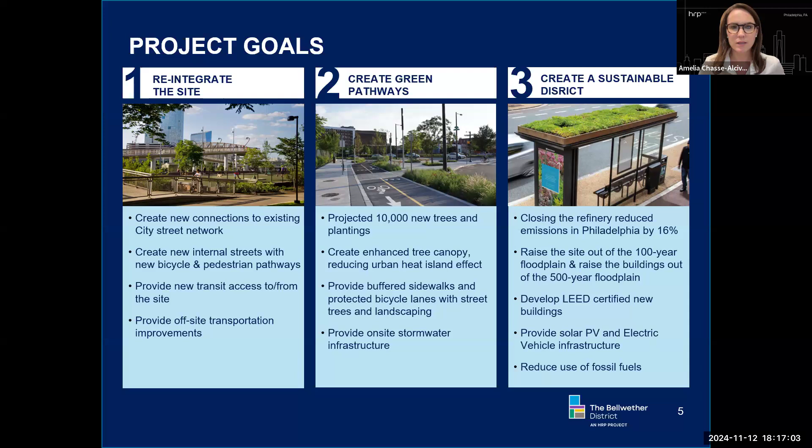This is a little bit outdated actually, we need a new one of these, but this is an aerial overview of the site from when the deconstruction was significantly complete, though it's much further along now. You don't see the rings of the tank bottoms anymore. It just gives you a look at what it was and shows the significant progress made.

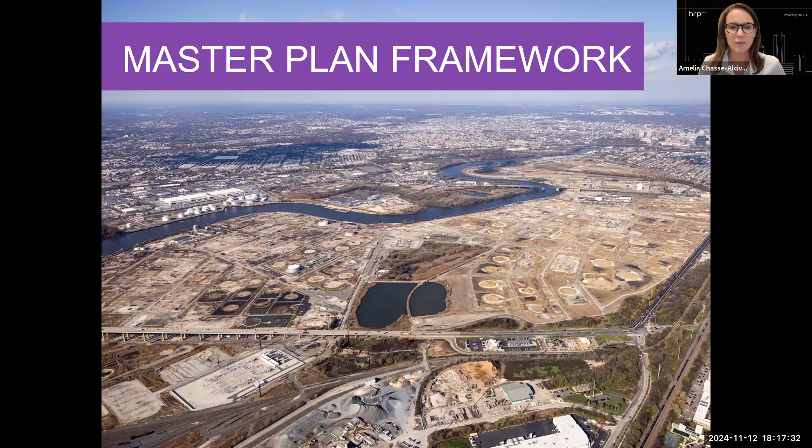This is an overview of our master plan. You can also find this on our website. I know it's a lot, so if you ever need to reorient yourself, it's available at thebellwetherdistrict.com.

We'll start with the north 250 acres that are north of Passyunk Avenue. That's where we're planning our innovation campus—think life sciences, technology companies, looking to extend University City, Pennovation, to the south, and have this be a walkable, bikeable campus where hopefully we can retain Philly talent in Philly and also provide opportunities for skills training for local residents in some of these jobs. I think it's important to note that not all jobs in the innovation industry, particularly in the type of facilities we're building, require advanced degrees. Some do, but many don't.

Then moving south to the industrial campus, south of Passyunk, this is where we're planning to build more industrial facilities, logistics, warehouse, storage, and marine uses. This is where we'll see significant job creation, about 10,500 jobs projected.

According to our economic impact analysis, at a minimum 50% and likely closer to 75% of these jobs will be accessible to individuals who don't have advanced degrees. So there should be significant opportunity for local residents to take advantage.

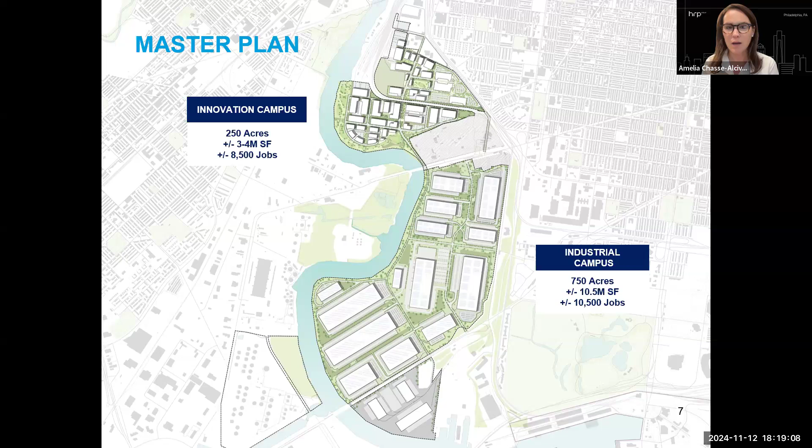Next slide. I'm going to pass it over to my colleague Blake Rowan to go through industrial site progress. Thank you, Amelia. Hi everyone, my name is Blake Rowan. I'm the Senior Vice President of Development at the HRP Group, focused primarily on our industrial campus. Very excited to be here tonight to show everyone the incredible progress we've made since the last quarter.

If you go to the next slide, everything shown on the right side of the screen within the red box is our industrial campus. Within the blue shaded area, that's 447 acres out of the 750 acres we currently have permitted to date, and we've begun earthwork activities over the past 18 months. That represents nearly 2 million cubic yards of earthwork activity, so a significant amount of progress. We're excited that we're nearing the completion of that first phase. We hope by the end of this year to be done.

Everything shown in the tan color within the industrial campus is what we're going to focus on for phase 2 of earthwork activities. We're currently wrapping up the permit process, and we're eager to get started here in the next couple of months. So just a lot of progress. If you go to the next slide.

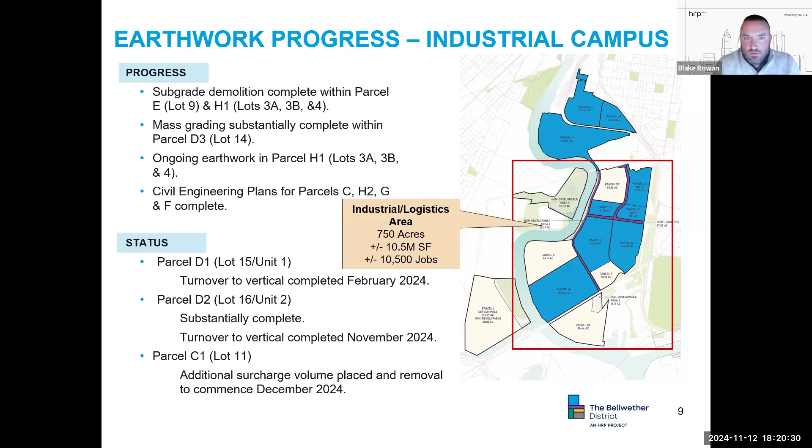Some of the fun facts we like to show: the amount of pipe removal we've had to work through during the demolition progress. During the demolition of the old refinery, we spent a handful of years demoing everything that was above grade. Over the course of the last 18 months, we've focused on the subgrade demolition. We completed 950 miles of above grade piping removal, and we encountered over 85 miles of utility and refinery pipes that we've removed, and we're continuing to encounter more each day as we work through the demolition progress.

As I mentioned, our first phase of earthwork is about 2 million yards. To date, we're just over 1.7 million yards of soils that's been removed and relocated. Generally, we're taking some of the higher elevated areas on the more northern portion of our site and relocating that earth to the southern portion to balance it, then raising the site out of the 100-year floodplain, with building pads raised above the 500-year floodplain, as Amelia mentioned. During that earthwork activity, we created new sediment basins to handle and manage the stormwater. To date, we're able to manage over 45 million gallons of stormwater.

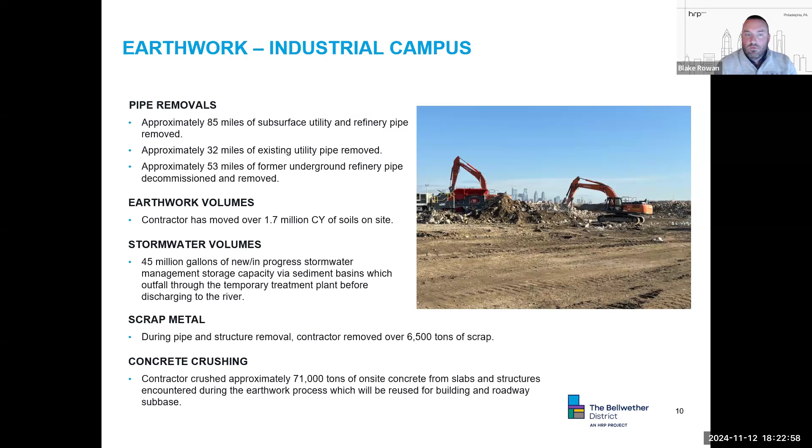All of that is then handled and pumped through to our treatment facility prior to being discharged into the Schuylkill River. During the demolition progress, we've been able to recycle all the metal we've encountered and all the underground pipes. We've removed over 6,500 tons of scrap, which is a great amount of recycled material. We've also utilized that same methodology on concrete crushing. As we've worked through the demolition, Amelia mentioned the tank bases, but also existing concrete structures previously used at the refinery. We're demoing, removing, and then crushing that material on site, where we intend to reuse that recycled concrete for future development.

Next slide please. This is a great view from about the midpoint of our industrial campus, looking north towards Center City. Lot 14 is currently in our master plan to be about a 1.2 million square foot industrial warehouse. That lot, fully mass graded, is just about 100 acres, and you can see the limits of where our new Francis Harper Drive will go around that and connect to our new Hartranft Street. You have the building just to the north, our Unit 1 building that Amelia talked through, and we'll show progress on that next. Just beyond that, you have another 48-acre site for our second building.

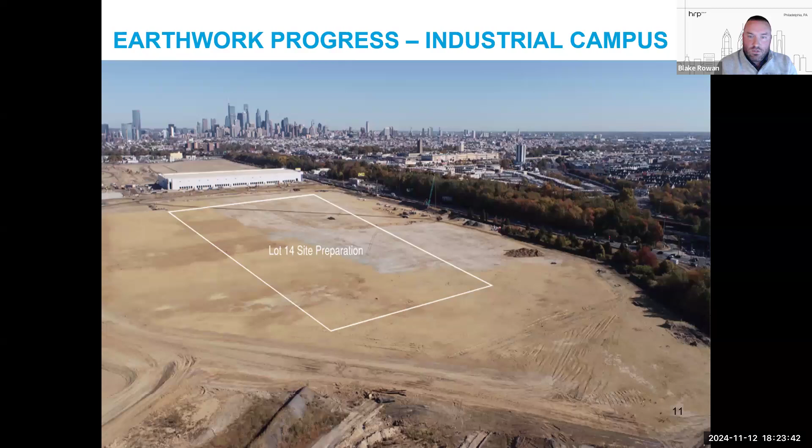If you go to the next slide, this is about the same vantage point, but looking south towards the airport. Our lots 3A, 3B, and 4 represent over 2.5 million square feet of new development. As you can see, some of the collection channels are that stormwater management I mentioned; all of that water is retained there and then pumped up to our treatment facility. This is where the site was really low from existing grades. We've begun to place that 2 million or so yards of material to raise it out of the floodplain. That work has made great progress, and we're near completion by the end of the year. Next slide please.

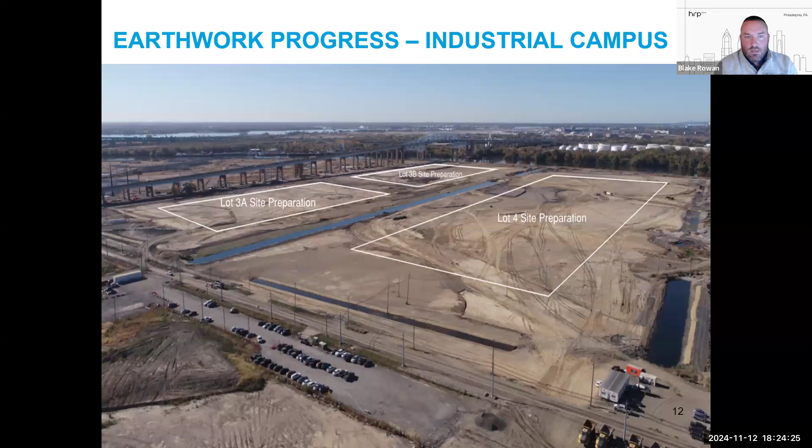We've talked a lot about this in previous meetings, but our first phase of infrastructure has been geared not only toward our first phase of vertical development, but also toward major off-site improvements to provide a grand entrance into the industrial campus.

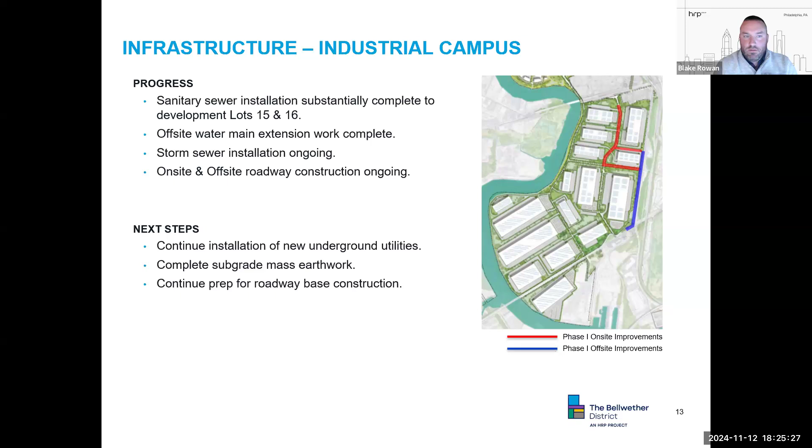If you go to the next slide, there's a great aerial photo. This is 26th Street looking north towards the city. I think this is a great image of the overall progress, both on-site and off-site. You can see all the trench boxes along 26th Street, which is the new storm drain we've had to install, and it shows the limits of where that roadway is going to be expanded and widened.

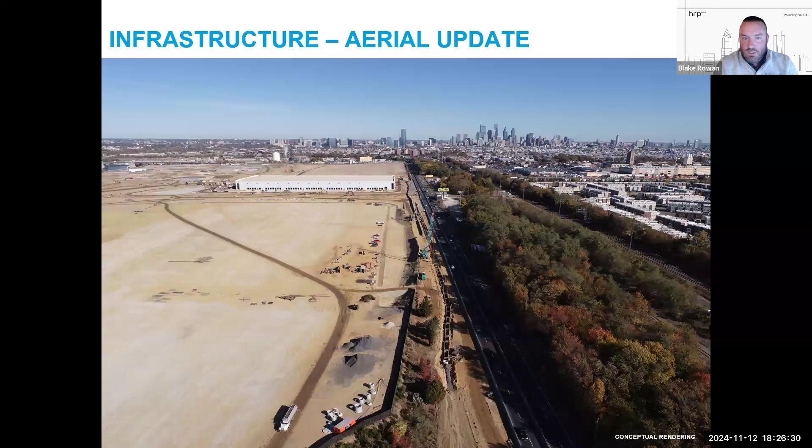That work, in itself, we're wrapping up here, all the way down to the intersection at Penrose and 26th Street. Hopefully in the early part of next year we'll start pouring curbs. If you're driving down 26th Street, you've probably seen we've made a lot more progress, and this aerial shows as of the past couple of weeks where we're starting to stone the roadway. We're starting to see the new lane take shape, and we're excited to bring that online.

This rendering I love. It shows the intersection of 26th Street and Hartranft Street, and what we envision the industrial campus to be in just a few short years. You can see the abundance of trees, over 10,000 trees we've committed to. Our first phase is to the right, where that building is really taking shape. There's a full new intersection we've made great progress on, and everything else is open for the future master plan.

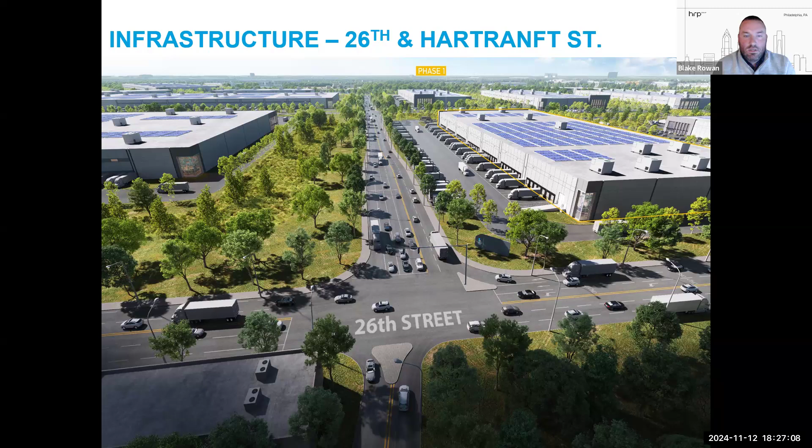We have some new utilities going down Hartranft Street. Our building is going up just to the east of the photo. Lots 14 and 9 are really to grade, and we're temporarily stabilizing them now to prepare them for future development. Everything shown to the west, before you get to the far end of our site, is over another 2 million square feet of potential development that we're eager to unlock.

Just north of our Unit 1 building is our lot 11, which could be anywhere between one and two buildings, another 340,000 square feet. To the northeast portion of the photo is our phase two earthwork that I mentioned earlier, which we're eager to get started on by the early part of next year. You can see where we started the earthwork, where there were some existing concrete structures, and everything is now ready to be moved and graded. We're excited to get started there.

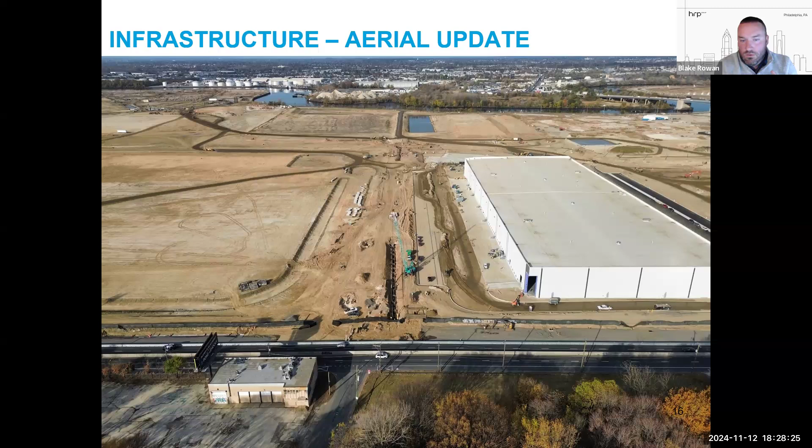Our Unit 1 building—I'm sure some of you have seen the conceptual rendering—but we're actually starting to bring this to life, and we're super excited to bring the building online. This is a 326,000 square foot speculative warehouse, meaning we don't currently have a tenant, but we're eager to bring one to our site in the city of Philadelphia in the very near term.

We've made incredible progress. All of our site utilities are done, the roofing is on, and our overhead doors are being hung. We're going to be substantially complete by the end of this year.

That's going to get started here in the next couple of weeks, and then we intend to... we have new glazing going in. Obviously, everything is making good progress.

Sorry, I'm choking. If you could go to the next slide. Sorry, fighting a cold.

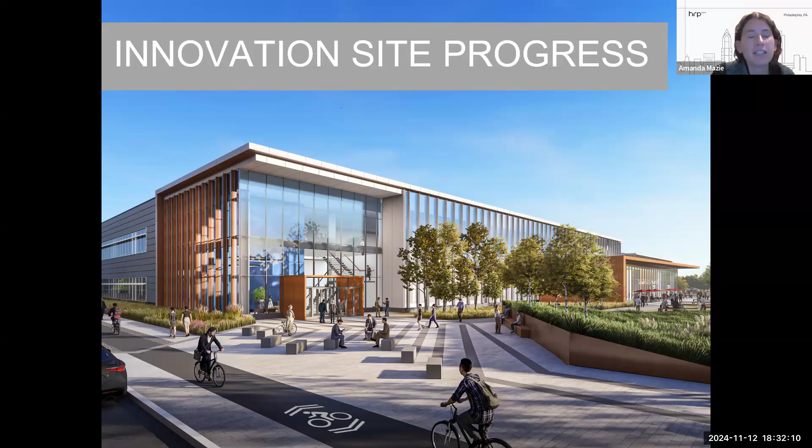So our first slide zooms in on the Innovation Campus Master Plan. Our site is approximately 250 acres, and we're currently planning 3 to 4 million square feet at full build out. Our campus is located north of Passyunk Avenue, just south of University City and Pennovation, with direct access from 34th Street, and is situated directly between the Schuylkill River and I-76.

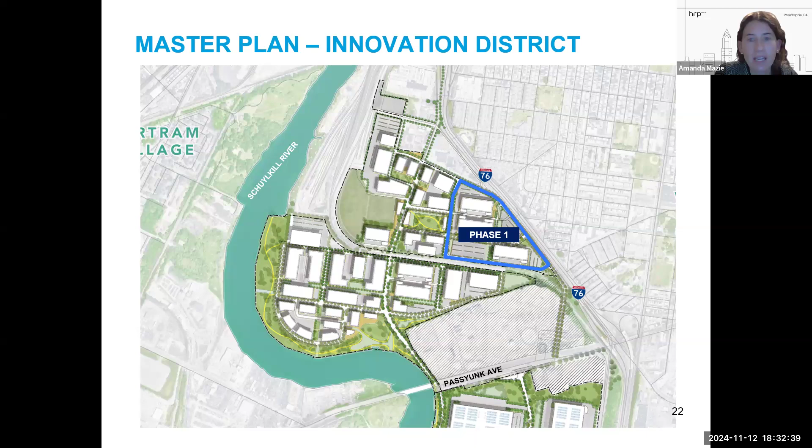Now zooming into our phase 1, our plan consists of approximately 40 acres in 500,000 square feet in 3 buildings. We chose this as our first phase because it's the closest to existing infrastructure and the surrounding neighborhoods, with direct access from 76 and University City. These first buildings are designed to accommodate biomanufacturing, processing, and production facilities along with tech-oriented uses.

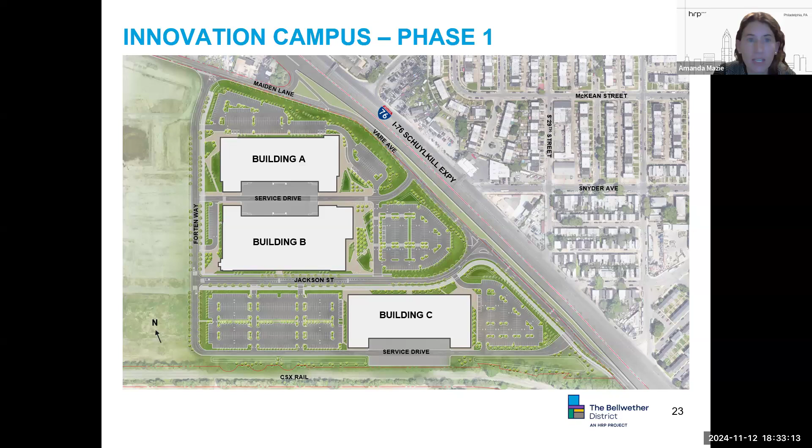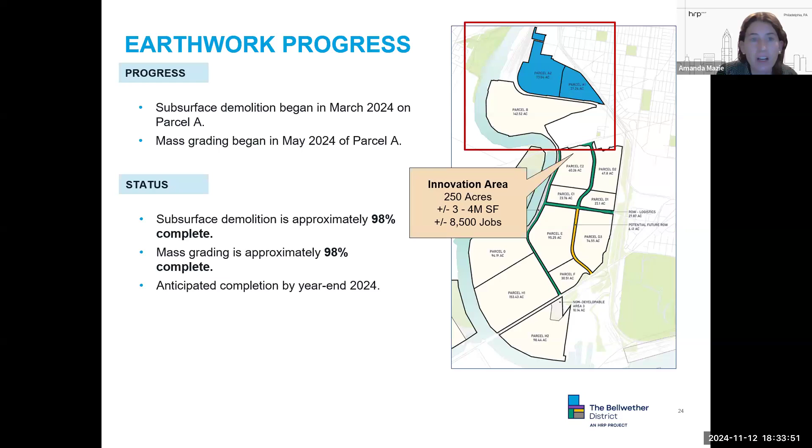And then we have a few examples here of site-wide implementation mitigants that we're employing for dust and odor control on the site. So I have them kind of listed here, and then a few corresponding pictures.

We have installation of temp stabilization, including straw, tack, and temporary seed over the completed mass grading areas. We've installed dust control fabric along the perimeter fencing. We have ongoing perimeter air monitoring with monthly reports distributed via our website. We have water trucks that are traversing our site daily along the haul routes. And then we also have various odor suppressant methods, such as misting fans and foams, to be used as necessary.

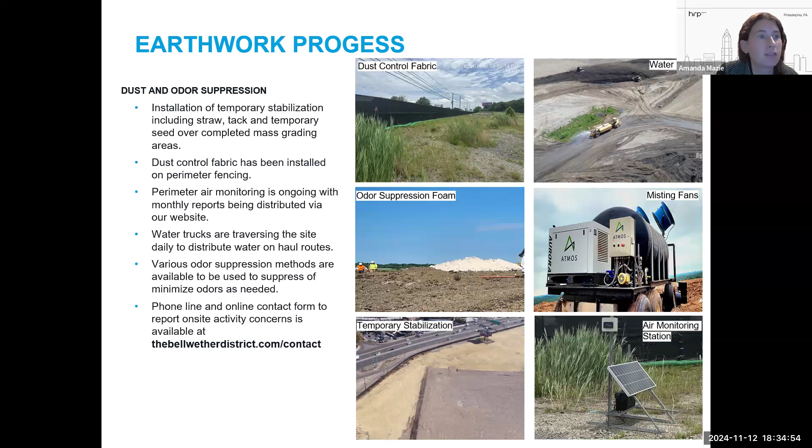And then we also have a phone line and an online contact form to report any on-site activity concerns, available at thebellwetherdistrict.com/contact. This slide shows an overview of the current earthwork activities on our site with an overlay of the future roads and our first two buildings.

So we have Jackson Street and Forten Way, and then Building A and Building B with two service drives as well. And this view is looking north with 76 and Center City in the background.

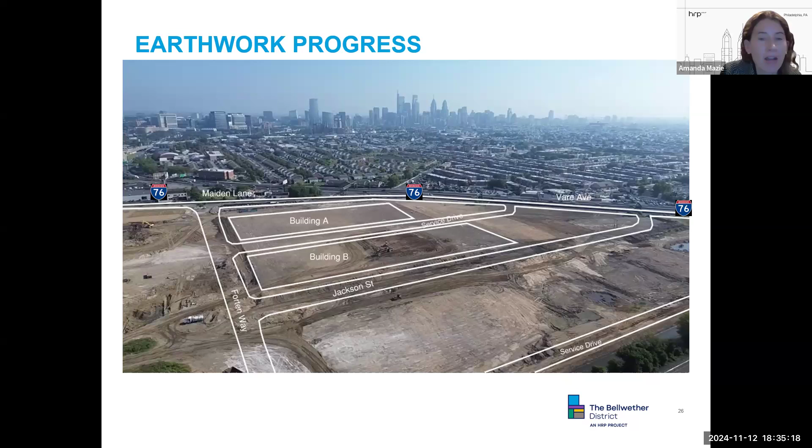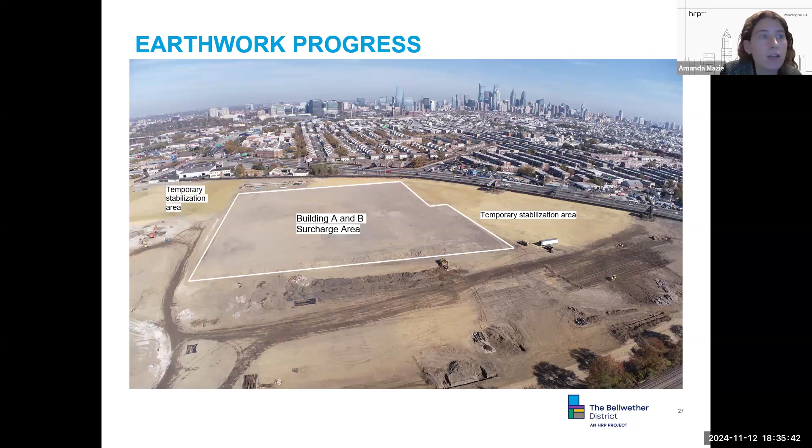Here's a slightly more recent image showing our surcharge area for Phase 1 buildings A and B on the northeast side of our site, which is a method to prepare our site for the future vertical buildings. Also shown is the temporary stabilization areas I spoke to earlier that directly surround the surcharge area.

Finally, a few stats on our campus in terms of materials removed from the site. We've removed approximately 210,000 linear feet of underground pipe, 140,000 of which was unknown refinery pipe. We've moved over 270,000 cubic yards of soil, and constructed 1.7 million gallons of new or in-progress stormwater capacity. We've also recycled over 3,300 tons of metal piping and demolished approximately 30,000 tons of concrete for future crushing and reuse on site.

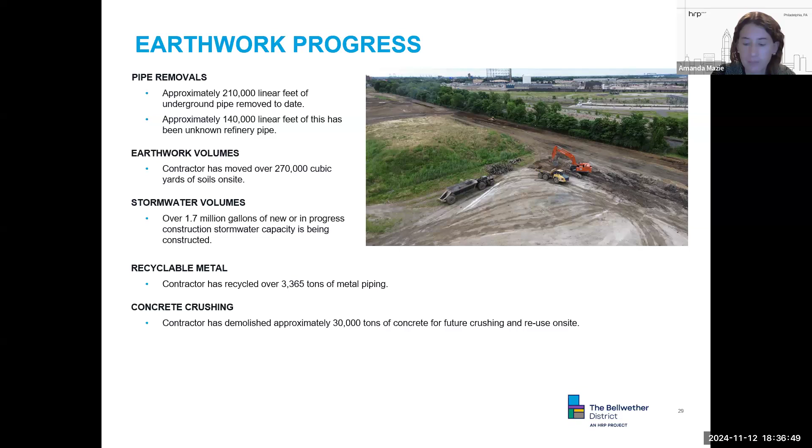Hi everyone, my name is Julianna Connolly, and I lead environmental remediation activities for HRP throughout the company and here in Philadelphia. I always like to start these updates in Philadelphia with a reminder, or new information for those who may be new, that there are two what we would call responsible parties on this property. I mean a responsible party in terms of environmental cleanup obligations.

Those two parties are ourselves, HRP—we took over environmental cleanup obligations that were the responsibility of PES, the last owner of the refinery—and also Sunoco and their affiliate Evergreen, who was a prior owner of the refinery prior to September 2012. They are responsible for cleanup activities that occurred prior to September 2012.

So the easiest way to think about who is responsible for what is: did the contamination get into the ground before or after September 2012? If it was before September 2012, that's Sunoco and Evergreen's responsibility. If it's after 2012, it's our responsibility.

In addition, we also took on some additional responsibilities as part of our acquisition of the property. One has to do with closure of those many storage tanks that those familiar with the property would have seen historically. They've now all been removed, but as part of their removal, there is sampling that occurs beneath where the tanks were formerly located in order to close those tanks under the state's tank regulation. That is our responsibility as part of our demolition work, and I'll talk about that more later.

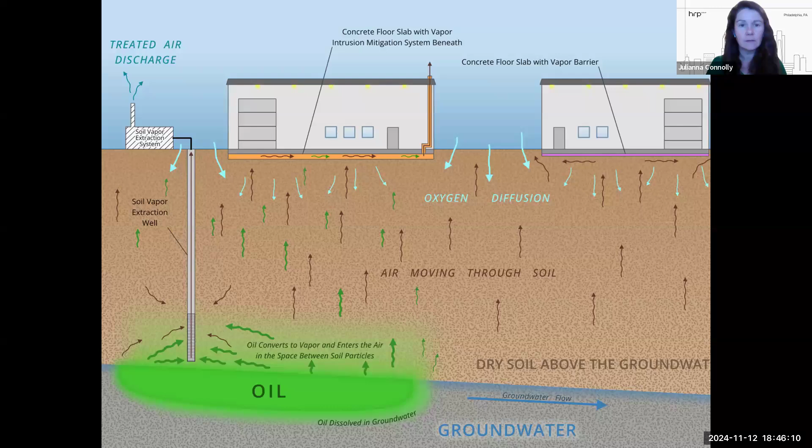Another component of our work is closure of the many above ground storage tanks that used to be present on the site. We are working through the regulatory closure of those tanks, which involves a lot of sampling in the soil and groundwater beneath where the tanks were present. As we get that data back, and we already have lots of data because this tank closure work has been occurring for the last few years, we then need to interpret it relative to the existing contamination that is already there.

The refinery was present for over 100 years, so there was a lot of contamination already in the ground. We have to sort out whether the concentrations we detected under a tank indicate a release from that tank, or whether it's contamination that was already present. That's the phase of work we're in now—sorting out whether the data indicate the potential for a new release or not. And if they do indicate a new release, who would be responsible depends on when it appears that release occurred—did it occur before September 2012 or after? There's a lot of work going on there, but we're moving through it over time.

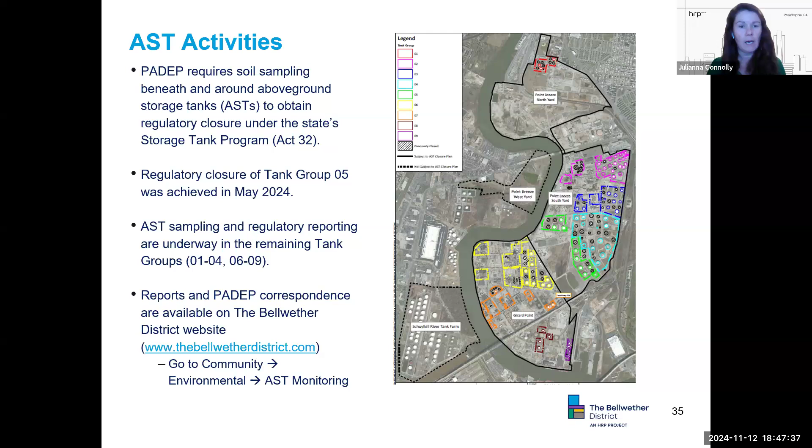Soil management is another thing I mentioned. As we talked about, we're moving soil at the site to get the grades, the physical elevations necessary for redevelopment. What we committed to do prior to moving the soil is make sure we knew what was in it before we moved it. So all the soil we're moving was sampled for chemical analysis beforehand. We know what's in it, and we have a soil management plan available on our website that documents that sampling and what we needed to do.

Based on the sampling results, the soil is grouped into different categories, from less contaminated to more contaminated. Depending on the category, there are certain places where it is or isn't appropriate to reuse the soil. For example, more contaminated soil needs to stay farther from the river, or be located under a place where there will eventually be a barrier. So in addition to characterizing and sampling the soil before we move it, we also have environmental professionals on site watching the soil get moved, to make sure it ends up in its final position in a place that's appropriate and in accordance with the soil management plan. Lots of eyes on the soil as it's moved around—that's the big takeaway.